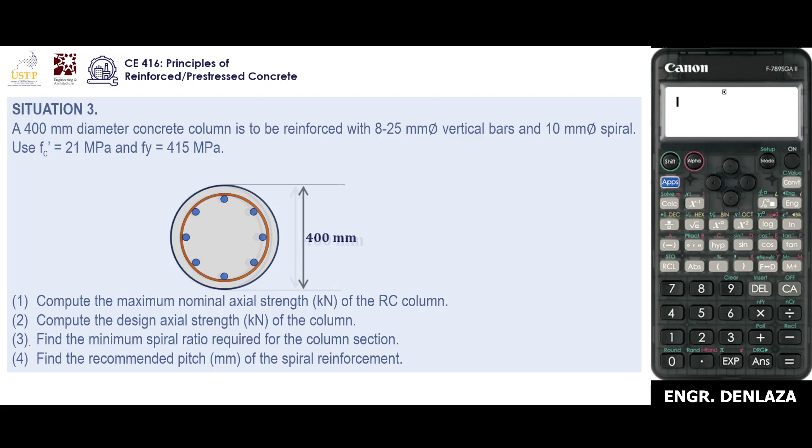First problem is, since we know that this is a spiral column, lahi na ang atong multipliers. So since this is spiral, 0.85 na atong diri nga portion. Kaganiha 0.80, karon 0.85 na because this is a spiral column, right? Sa Po, same lang gyapon sila equation sa tied column. So that's gonna be 0.85 f'c (Ag minus Ast) plus fy Ast.

Now, do we have a value for Ag? Obviously naa because we have diameter of the spiral column. Now, sa Ast, we can also solve this because given man ang atong vertical bars and their numbers. So, basically, plug in lang ka, 0.85. Take note, ayaw jud mo kalimot sa parenthesis. All of these terms are multiplied with the multiplier 0.85.

f'c is 21. And then take note, since this is circular, that's gonna be pi over 4 times 400 squared. Now, minus, since there is a given vertical bar diameter, that's gonna be 25 and there are 8 of them. So that's pi over 4 times 25 squared times 8. Take note, naa pay dugang nga last term which is fy Ast. So, 415, then same term sa Ast, simplify, makuha nga 3,232.30. And ana lang kasayon, you will be able to get the nominal axial strength.

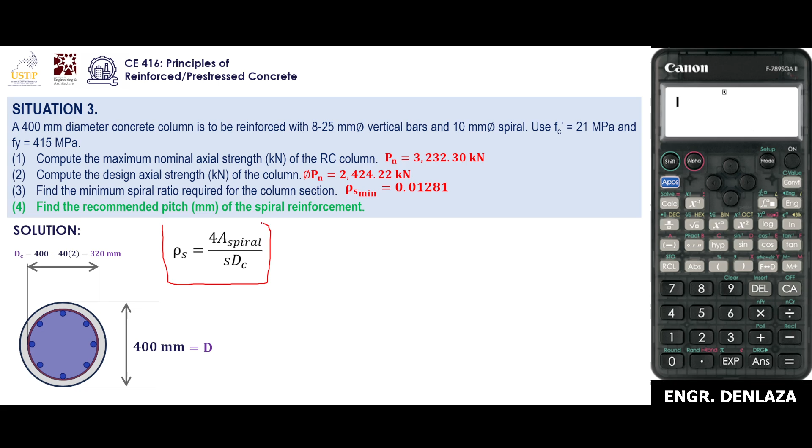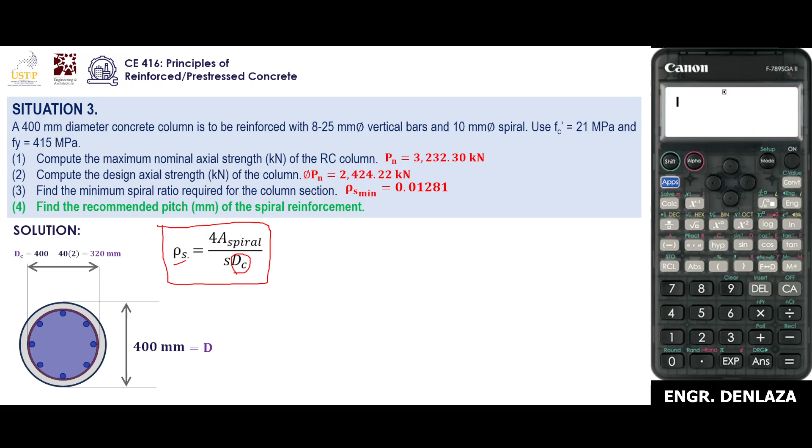So recall, this is the equation for the pitch of the spiral reinforcement. That's gonna be rho s is equals to 4 times area of your spiral over S times Dc. So we already obtained Dc and rho s. Actually, ang atong ginapangita ani is S pertaining to the spacing of the pitch. Now, since we do have those values, plug in lang ka sa mga values: 4 pi over 4 times 10 squared all over S times 320. Now, you will be able to get 76.65 mm as the pitch spacing.

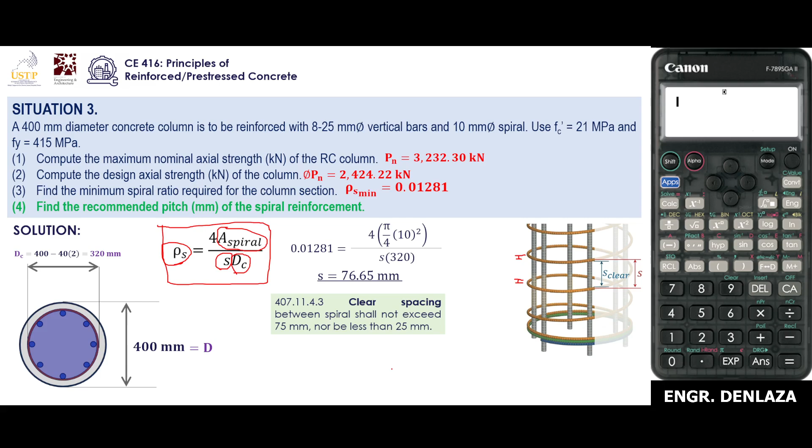Pero kung gi-mention ko ganiha, you still have to check whether ang kaning 76.65 pasar ba siya sa katong conditions nga gi-set. So take note nga according sa code, ang clear spacing between spirals shall not exceed 75 mm nor be less than 25. So kung 25 iyang minimum, kinahanglan ta mag-add og katunga ani. So pila ba ang spiral diameter diri, di ba 10? So naa kay 5 diri, and another 5 here. So ang minimum is just 25 plus 5 plus 5, that's gonna be 35.

And then sa maximum, that's gonna be 75 plus 5 plus 5, 75 plus 10 obviously, so 85. So ang maximum is 85, minimum is 35. So checking, 25 plus 10 is 35 ang minimum, and then 75 plus 10 is 85 ang maximum. So ang 76.65 is in between 35 and 85. So that means to say okay ra ni siya nga spacing. So round down ta, 75 mm atong final answer for this problem.

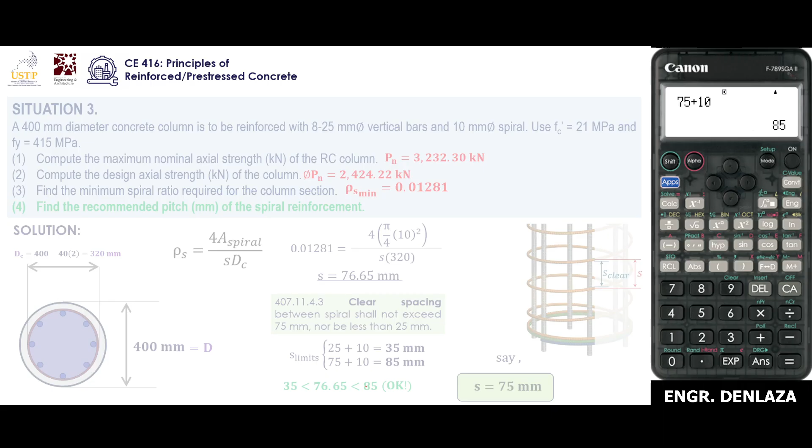Ina na lang siya. Now, that's gonna be situation number 4. So, nasabtan na to guys nga problem, dili ra siya complicated. Okay. So now, I want you guys to get your calculators para makaapas mo sa solving niya. Kay I will be introducing you the traditional way of solving, pero I will also teach you to do the calculator technique. Taas-taas kasi siya nga process. So, feel nako if dili mo sabay, mas maglibog mo. So, sabay mo karon samtang magkalkula ko.

Anyway, before we dive into the next situation, I would like to introduce you some concepts para ma-envision ninyo ang inyong ginasolve. So, presenting you here is the comparison between geometric and plastic centroids. So first, let us define what is a geometric centroid. Technically, it's basically the center of the shape. By definition, it is strictly a property of the section's visual boundaries. It is the mathematical average position of all points in the shape. So basically, center ra gyud siya sa shape.

In contrast, the plastic centroid, in other terms, you can define as the center of resistance. What does this imply? Plastic centroid is where the resultant axial force acts when the entire section is crushed to its ultimate capacity. It is basically the balance point of the internal forces, both concrete and steel. So in layman's terms, the plastic centroid is where your column provides resistance to the applied loads. So siya basically ang location diin makita ang loads nga mo-counter sa mga actual loads.

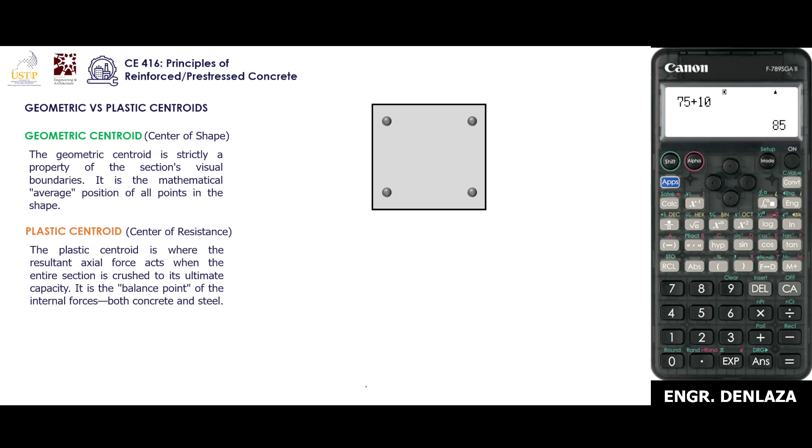So I want to show the differentiation between these two centroids. So, ang isa ka shape, butangan nato ang isa ka column nga naay mga reinforcement as shown here. Makita man tingali, no?

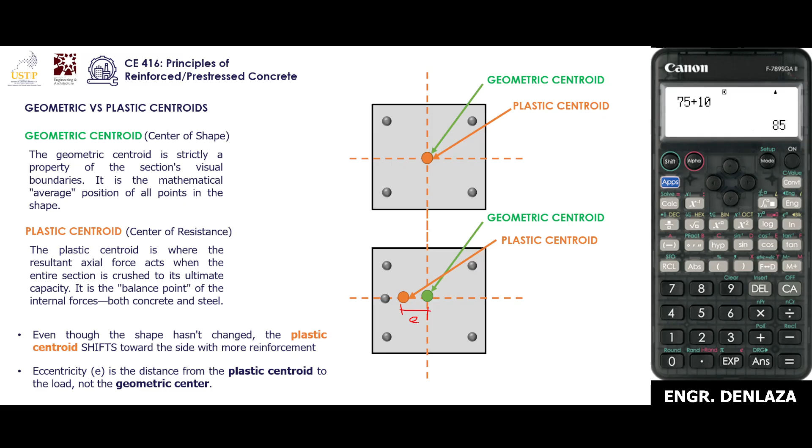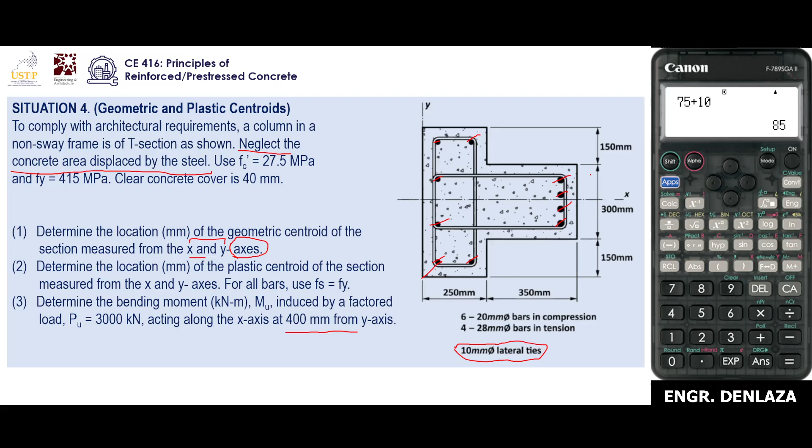Now I want you to take note of the dimensions. So basically 250 here, 350. All in all that's 600. Then 300 is the width here, plus 150 and 150, that's 600 total. So these are the dimensions you need when you solve this.

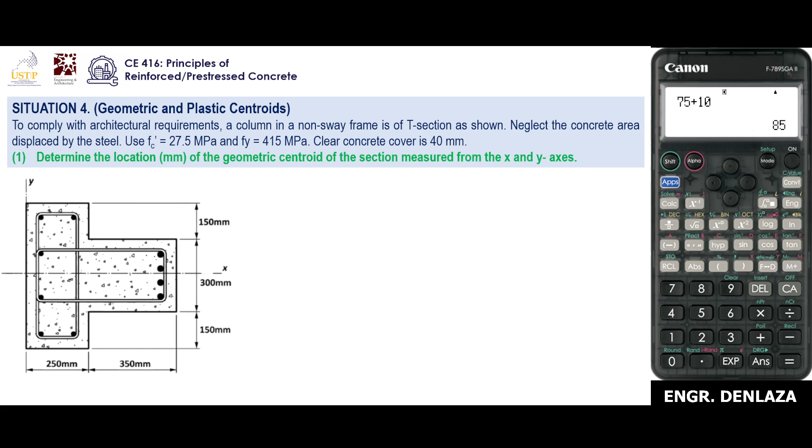Now, for the determination of the location of the geometric centroid from the x and y axis - if I look at this directly, I already know one distance is acting at the center. So for me, one of these is basically zero, but let's try to solve it anyway.

So let's solve. First, the total concrete area - solve for the total concrete area. This is just 250 times 600, since 250 is the width here.

You will take this as two shapes so you don't get confused. This is area 1, and this is area 2. So, 250 times its height, which is 150 plus 300 plus 150 - that's basically 600. Did you get that?

Okay, shaded. Now the next portion is 350 times 300, to get area 2. So this portion here is 250 times 600, plus this portion here, 350 times 300. And that gives us 255,000 mm squared. So we've obtained the concrete area.

Now, our next step is to locate the geometric centroid. So as an estimation, it's probably there, and this distance is the location of the geometric centroid.

By Varignon's theorem - who still remembers Varignon's theorem? Area total times the location equals area 1 times its location, plus area 2 times its location, right? So, area total times x-bar equals A1 times x1, plus A2 times x2.

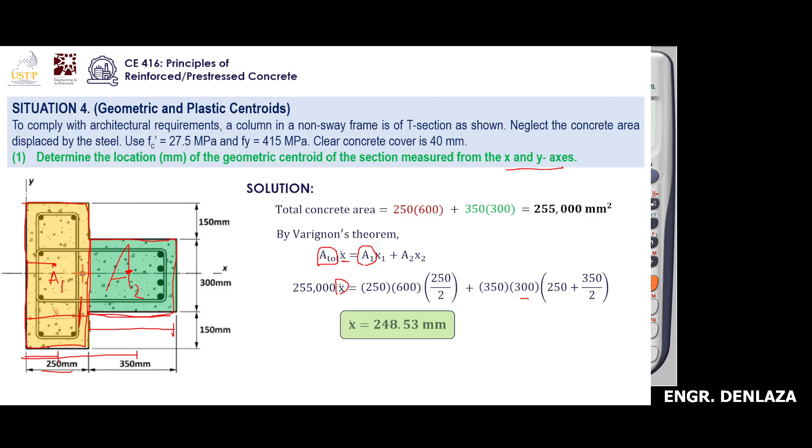I think regardless of the type of calculator you're using, even Casio, the prompt will look similar. Let me open Casio. Wait... can you see it guys?

If you're using Casio, you'll do the same thing - that's mode 3.1, standard deviation, same display as the other calculator. Mode 3.1, then you turn on frequency: shift, mode, down arrow, then press number 4.

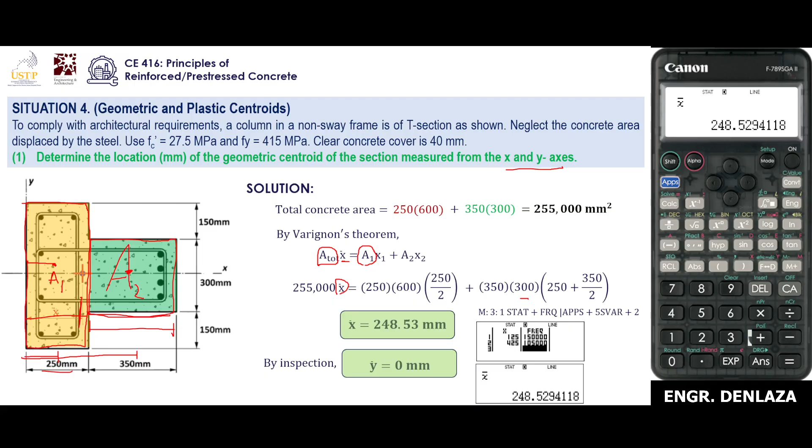Though maybe you did not even know how to do the traditional way. That's why dapat ang pagtudlo sa inyo is itudlo sa inyo ang traditional way before mag-calc tech, para ma-appreciate ninyo ang ma-save na time pag mag-calc tech. And then in case malimot sa Caltech, you can definitely go back to the traditional way.

So kung board exam purposes, calc tech ang atong himuslan. Pero for the purpose of educating you since you are still in the undergrad, that's why I opted to show you the traditional, then Caltech. Dili ta diretso Caltech nga nagsige na lang memorize sa steps wala nakasabot nganong inana. So going back, ang atong buhaton karon traditional way.

So how do we determine the plastic centroid of the section measured from the x and y axis? So for all bars, FS = FY. So first, we will now be considering the locations of your reinforcement. So obviously naa tay three lines here: line 1, line 2, and then line 3. Ma'am, unsa na nga line imong pasabot? Ang pasabot nako is ang locations sa imong mga reinforcements padulong sa Y axis.

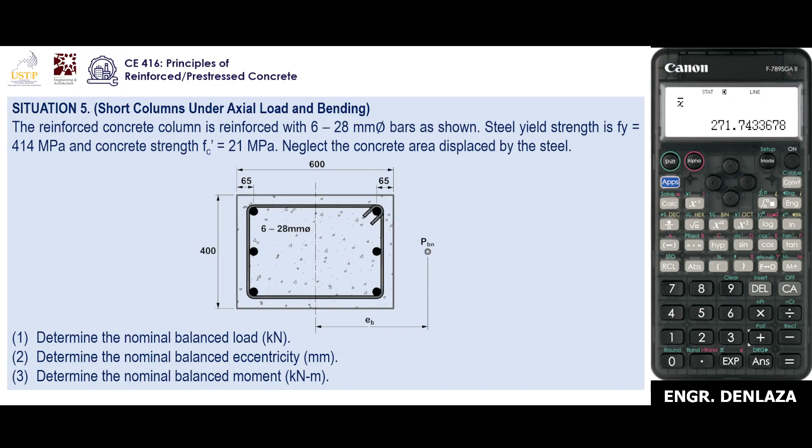So, same ra gyud ang knowledge sa inyong tensile strain sa singly. That's the balance ratio, right? The depth of the neutral axis. So, C balance is 600d all over 600 plus Fy. So, pila man ni siya? Si effective depth, wala pa man nagamit si effective depth. Pila man na siya? That's 535. So, that's 316.57.

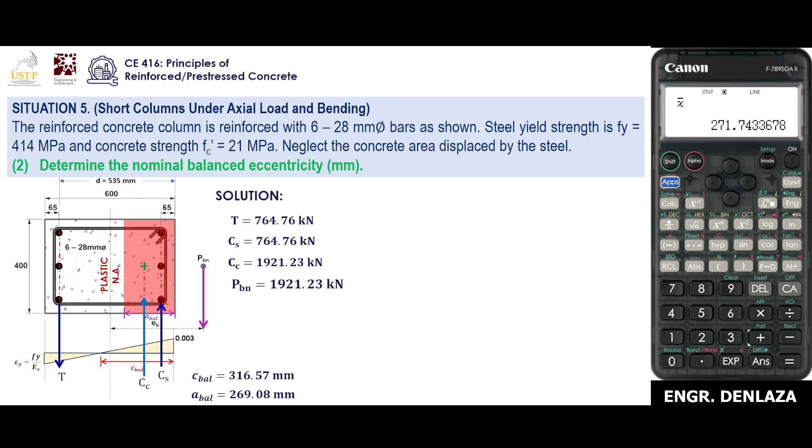Now, next is determine the nominal balance eccentricity. So, unsa man na si nominal balance eccentricity? You take the moment, counterclockwise lang for convenience ang positive.

So, 1921 CC. Okay, CC negative ni CC mag-check out na po. Char lang. CC is negative 1921.23. Ting ning ning char.

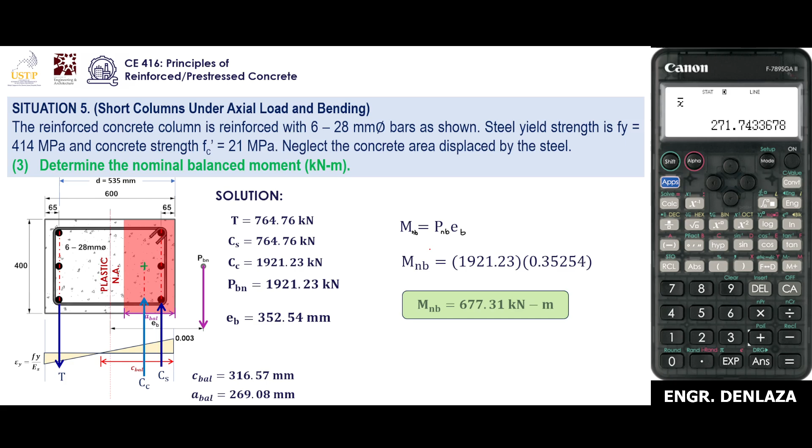And then I think last, determine the nominal balance moment. P times E. Nakuha naman nimo si PBN times nimo sa eccentricity nga nakuha ganiya. That's 677.31 and that's already the final answer.

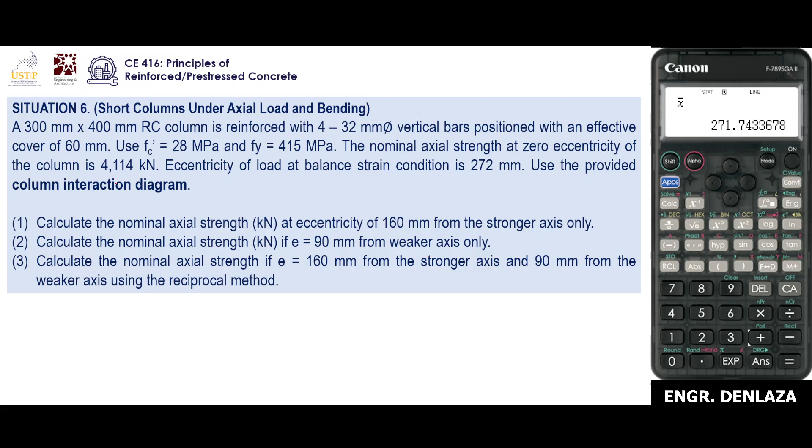So now, we have here a 300 mm by 400 mm RC column, reinforced by 4-32 mm vertical bars, positioned with an effective cover of 60 mm. FC prime and FY, nominal axial strength at 0 eccentricity. Kibali, kanang 4114 is concentric load nga Po. Tapos, eccentricity of load at balance strain condition is 272. And then, naihatag nga column interaction diagram. So, naipasolve nga mga nominal axial strength pero lahi-lahi og eccentricity and ang i-consider nga axis. Okay? Sige, start. Let's go.

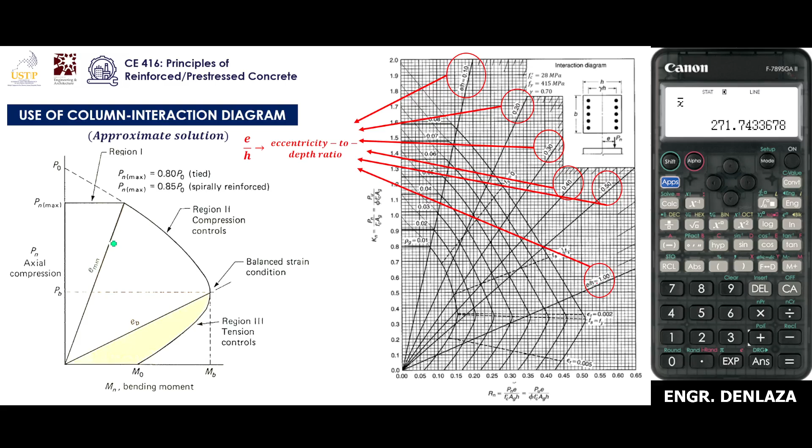Now, let's solve this first problem. Calculate the nominal axial strength at eccentricity of 160 mm from the stronger axis. Now, makapangutana naman kunta unsa day stronger axis ani. So, obviously, katong side nga mas taas og length. So, sa 300 and 400, unsa lugar ang mas taas og length? Di ba ang 400? So, mao siya ang ma-considered as stronger axis, a stronger side.

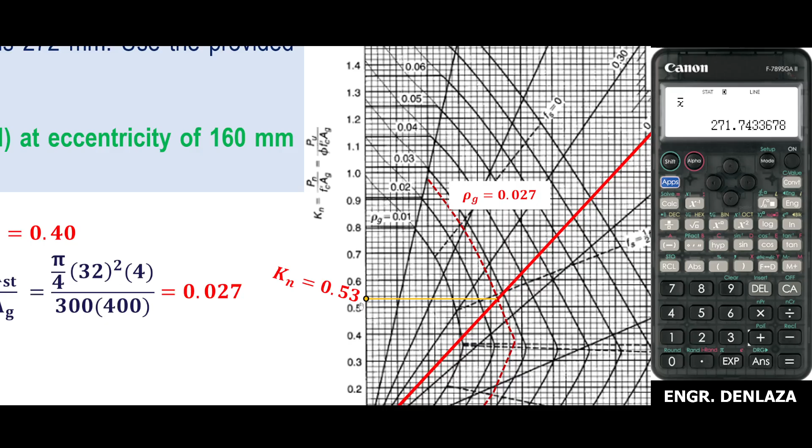After ana, kuhaon nimo kung asa nag-intersect ang 0.027 ug ang 0.4. Naa siya 0.5 here, then 0.6. So, wala pa siya naabot sa tunga. So, KN nga ma-consider is 0.53. So, since naa na tayo KN ug rho G, all we have to do is... naglag.

Wait lang guys. Naglag siya. Ni-give up na ang laptop, daghan tabs naka-open tungod aning OBS. Cool down time mga 2 minutes. Hindi na siya magpapindot. I-end share, or i-exit sa task manager.

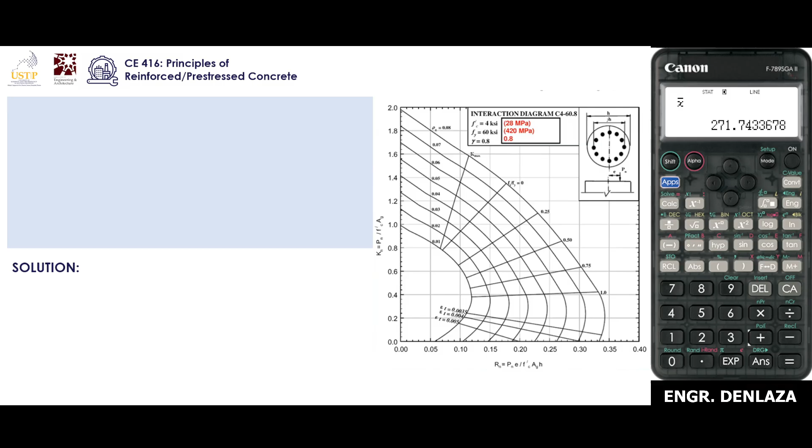And then for the Rn, if you've solved Kn, you can also solve Rn. You already have the value of Pn if available, then it's automatic. But in this case, P times e is the nominal load times the eccentricity. It can also be the M or Mu.